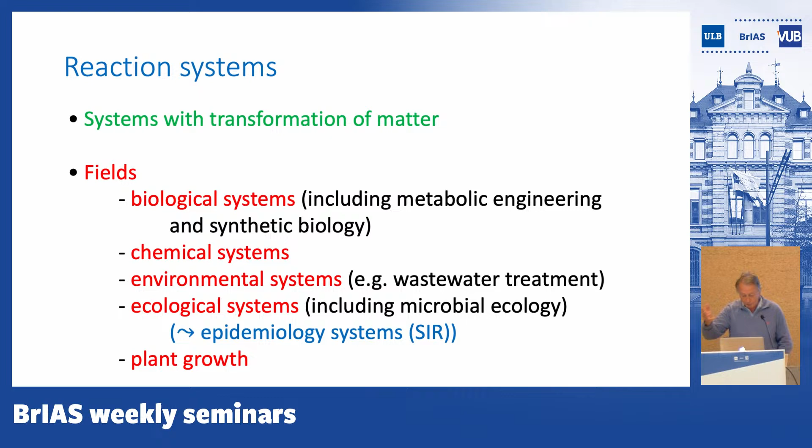And I'd like to mention also plant growth, which was one of my favorite topics. A plant is clearly a biological system, but not as microbes; it's an important biological system, and therefore it is a reaction system.

So what is important to understand is what is different about reaction systems from any other dynamical system we consider in automatic control. First of all, the variables are concentrations, temperature, quantities in ecology, for instance—these are positive variables. In mechanical engineering, you have position or velocity, which can be positive or negative, but that's not the case here. These are all positive. The energy functions are not quadratic functions, and that's because, in some sense, it's fundamentals of thermodynamics related to this kind of reaction system—it's really related to the fact that the properties don't need to come with square values of variables to give energy.

Dynamical models typically come from fundamental balances—mass balances, energy balances, and sometimes momentum balances, which is probably also very typical of what we have in reaction systems. On top of that, most models, 99% of them, are nonlinear, but also come with large uncertainty on the parameters. And there's also a lack of accessibility to many important variables. In many instances, for any of the examples I mentioned before, it's very difficult to get online, precise, reliable measurements of the variables that are important for the dynamics of the system.

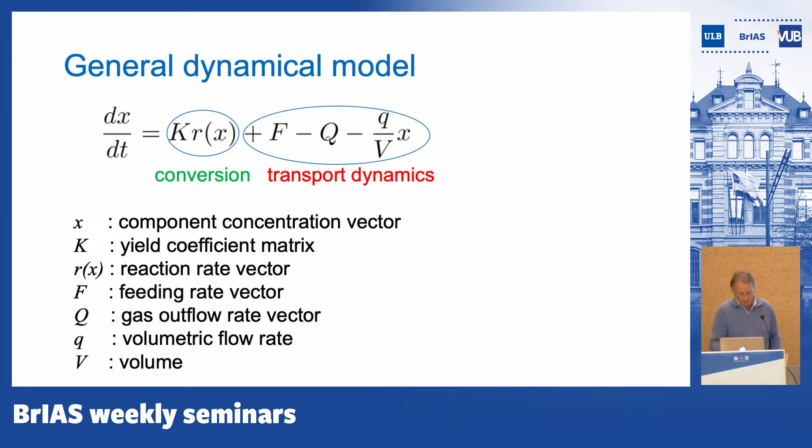Lowercase q is typically a volumetric flow rate, and V is the volume. Having said that, I have everything to go ahead.

Let me take a first example: anaerobic digestion, which is a wastewater treatment known for centuries. It has the advantage of producing methane, so it was very popular at some point, typically with the first oil crisis in the 70s, because people said we found an alternative to produce energy without oil. Anyway, that's a long story.

But this process is very complex. In bio, they say this is an open medium, meaning you have a lot of different species, a lot of different bacteria, if you prefer, that interact. And when I say a lot, it can be thousands. But one way to look at it simply is to consider that typically you have only two populations.

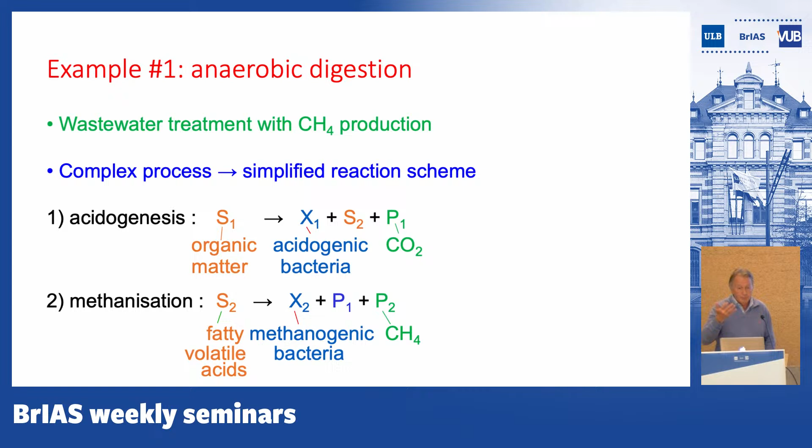So this is what I call a simplified reaction scheme. I have a first step called acidogenesis, when you transform the organic matter you want to degrade by acidogenic bacteria into volatile fatty acids. These volatile fatty acids are then degraded to produce methane and CO2 at the same time, but this is done with methanogenic bacteria.

So if I consider that, my model will be written as follows. I have mass balances for the acidogenesis, the first two elements in my first reaction, and then the second step. What's interesting to look at here is the volatile fatty acids: it is produced by the first reaction, consumed by the second. This is very simple, mass balances, very easy to note.

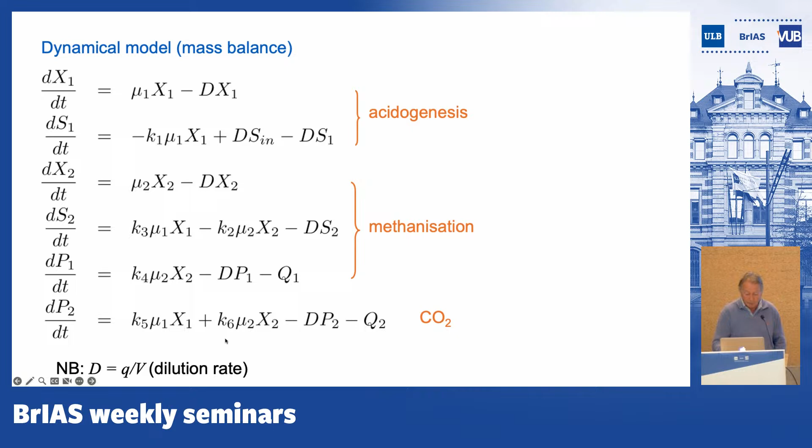In this case I use the classical notation of bio, where D is the dilution rate, which is nothing but the ratio of q over V. So if I want to put that in my general dynamical model, it's very simple: I just have to define my state vector with all the components in the reactions, and my yield coefficient or stoichiometric coefficient matrix.

So each column corresponds to each reaction, and each row corresponds to the intervention of one component in each reaction. For instance, volatile fatty acid is produced by the first reaction, plus K3, and consumed by the second, minus K2. Very simple, and it's completely general.

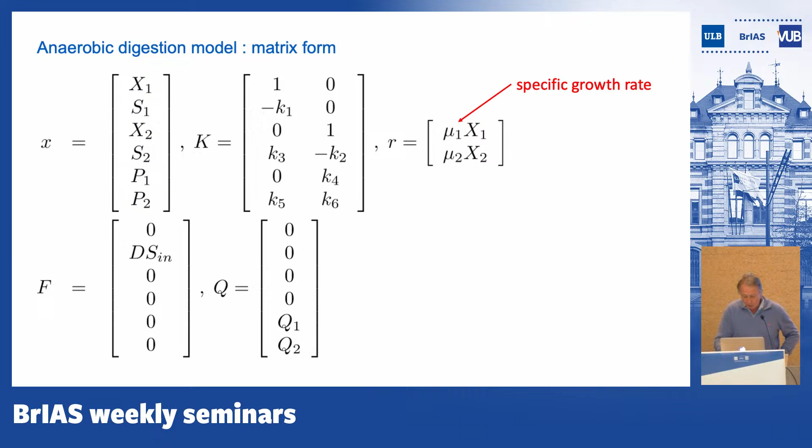What's interesting in that case is that for bio, if we have bacteria, typically the reaction rate is the product of what is called the specific growth rate and the concentration of the bacteria involved in the mechanism. This is known as an autocatalyst: you need the biomass to have the reaction, but the biomass is at the same time produced by the reaction. So that's why it is not just a catalyst, as known by chemical engineers, but an autocatalyst. This is a word you could keep in mind if you wish.

And then you can have a lot of other dependencies. For instance, you know that one type of microorganism will be active in a specific range of temperature. Okay, fine, so let me look at the bio, let me look at the chemical example.

In that case, typically what is a matter of issue for control is the fact that you have a reaction that can explode, if you wish. This is typically known as a non-isothermal exothermic reaction, so when the reaction enthalpy might be negative, this can be a source of problem when you want to control it.

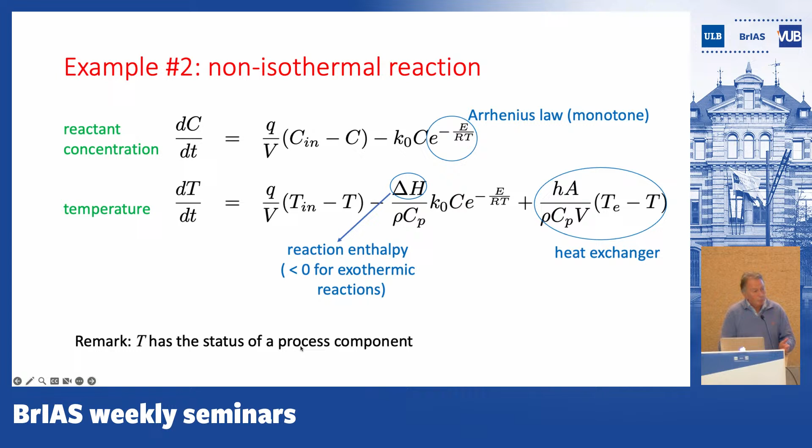Let me move to a third example, an ecology example, the famous prey-predator model, where you have a mass balance for the prey, with a growth rate and a consumption term by the predator, and for the predator, that's the production by consuming the prey, and then you have a mortality rate.

This is exactly what I would have in that case in the general dynamical model. Once again, it fits in the general dynamical model.

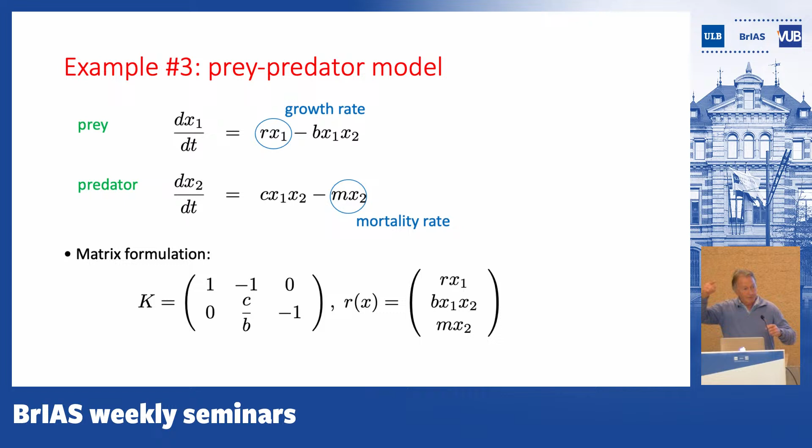And this is a great example. I could tell you for long about that model because there are so many nice properties, including the fact that it's periodic. With that model, the idea was to emphasize that typically when you have a lot of prey, it tends to lead to an increase of the predator. They have a lot to eat, but then the number of prey decreases, and then the predators don't have enough to eat anymore, so they decrease, and at the same time it's a kind of periodic behavior which is observed a lot in nature.

Okay, so now I have my basis, I have my model, and I can start working. But I want to do more, because I want to see what I can do - can I take advantage of the fact that this reaction system has some specificities? So that's what I would like to mention: reaction invariance and slow-fast dynamics.

The notion of reaction invariant is very well known by chemical engineers in general, and chemists also. It's the fact that when you have a reaction A giving B, this means that the number of moles of B that I produce are exactly connected to the number of A that I consumed. That's a constraint, so in a mathematical sense this means there is a mathematical constraint somewhere.

So typically when you have a system which is closed with no exchange with the environment, in that case this is a true mathematical invariant. This is exactly what I show here.

So there's a general property: I can make a state partition XA, XB, such that some matrix KA related to XA is full rank. And the property is that I can define a variable Z, which is a linear combination of XA and XB, where A0 is the solution of this matrix equation. Then I can rewrite the dynamics for XA and Z, and it is completely equivalent. These terms are only related - independent of the kinetics or the transformation, let's say.

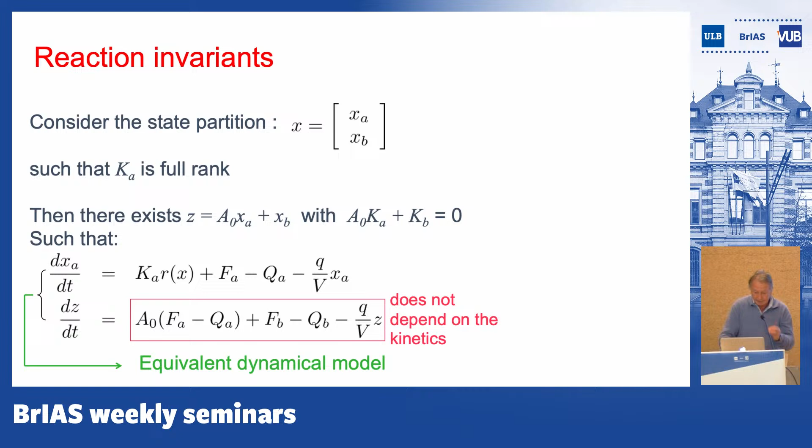And in that case, these terms, which are typically transport dynamic only, if the system is closed, this must be equal to 0. That's what I said just before. This is exactly the fact that in that case, it is a mathematical invariant. And this is a very strong property. So the idea is, can we use that for control?

Second property is what I like to call slow-fast dynamics, often mentioned as singular perturbation, but I like the way this slow-fast dynamics ends up coming up with a very well-known approximation in chemical engineering, which is called the quasi-steady state approximation. Let me try to explain.

Assume that I have a sequence of reactions, A1 gives A2 gives A3. And I assume that the first one is slow and the last one is fast. These are the reaction rates related to each reaction. K01, K02 are kinetic constants, but they have to be such that the reaction rate must be equal to 0 if there is no reactant. If I have no A1, I cannot have the reaction A1 gives A2.

Intuitively, even if you're not a chemical engineer, you will understand that very easily. If this reaction is slow and this one is fast, this means that any time I produce 1 mole of A2, it is directly transformed into A3. So it's like having one reaction, A1 gives A3.

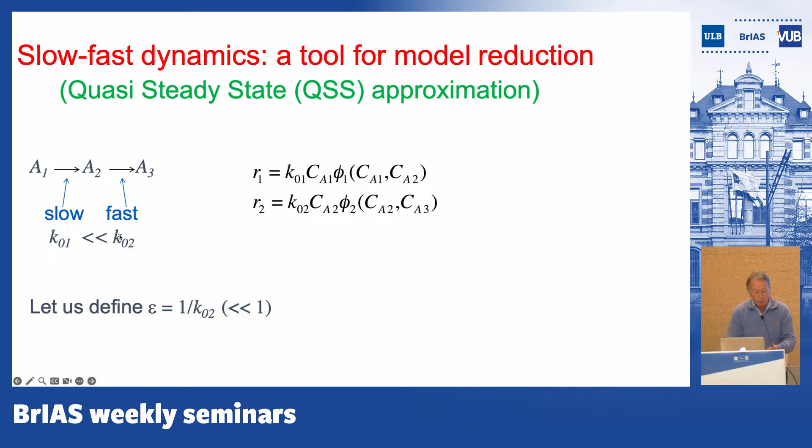So how can I come up with that conclusion? I define a small parameter, which is the inverse of the kinetic constant K02. And I rewrite my dynamical mass balance for A2, the concentration of A2, pre-multiplied by epsilon. I put epsilon to 0, and then I obtain this algebraic equation. Since typically I assume that this term phi has to be different from 0, the only option is that the concentration of A2 is equal to 0.

Second step, I make the mass balance for the sum of A2 and A3. I come up with this equation, but this becomes the mass balance equation for CA3 because CA2 is equal to 0. This is done because typically I say that A3 is produced by the first reaction. Simply as that.

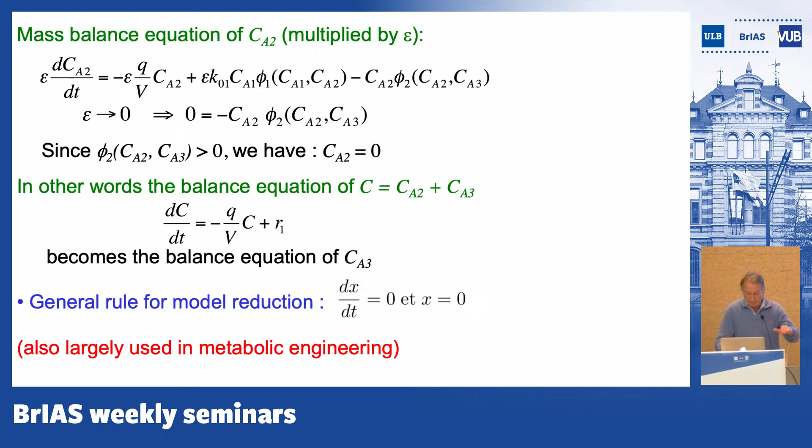So I can come up with a general rule with respect to that. But what is interesting is that, for instance, if you look at metabolic engineering, this property is very largely used too. It's a very common assumption that's used. The quasi-steady state approximation that I justify here is very common in metabolic engineering. So I try to make the connection with every field that I mentioned before.

Okay, let's move to state observer. And then I would like to say I can use my reaction invariant. My reaction invariant says that I can write the dynamics of the system, part of the dynamics, independently of the kinetics, which is an issue because I mentioned that I have a number of models, typically for the reaction rate, but all these models are typically heuristic. There's no fundamental model used in practice for kinetic modeling.

So in that case, this is an issue. I would like to have a state observer which is in some way insensitive to the knowledge of the kinetic modeling. So now I make another partition when I put x into x1, what I measure, and x2, what I do not measure. I rewrite my z that I mentioned before as a linear combination of x1 and x2.

And I have to make sure that I can invert A2 in that case. In some cases it's just a left inverse, but it's a classical inverse in most cases. So then what I do, I compute z from the equation that I mentioned just before, and then I invert this relation just to get an estimate of the variable that I do not measure.

And this is an observer, even if I don't have, as a classical observer, a correction term, this is an observer. Because I can guarantee, that's why we call it an asymptotic observer, the convergence. And the guarantee of convergence is related to this condition, which is very classical in adaptive control, called the persistence of excitation condition. So I can guarantee that as long as the dilution term, the flow rate, is not equal to 0 for too long, then the estimation of x2 hat will converge to x2, the true value.

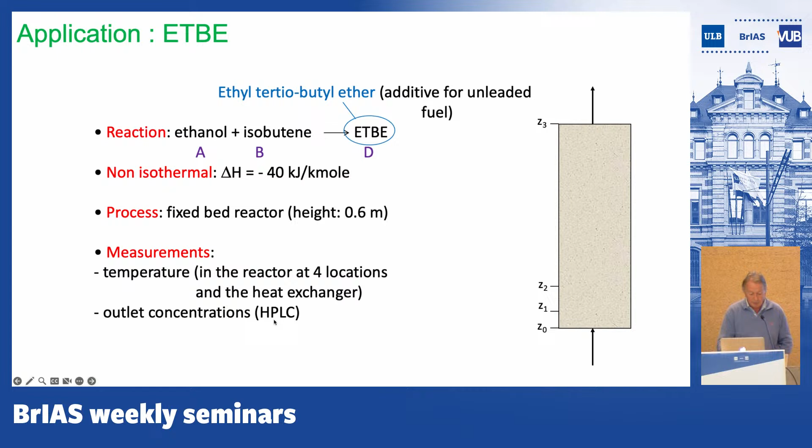The process, so I mentioned it. What we measure is the temperature at 4 locations: inlet, outlet, and 2 positions in the reactor. And also we measure the concentration via an HPLC at the output of the reactor.

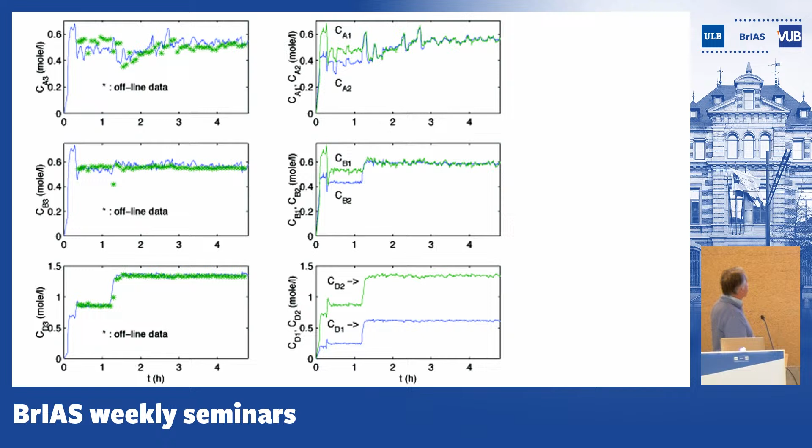So these are typically the measurements that we have in that case: the temperatures, and the concentration. This is typically what we obtain in terms of estimation. As you can see, I have a quite good fit of the different variables in that case.

Okay, online parameter estimation. As I mentioned, there might be a lot of uncertainty typically on the parameters in the model, so we probably need tools to be able to reconstruct the parameter online.

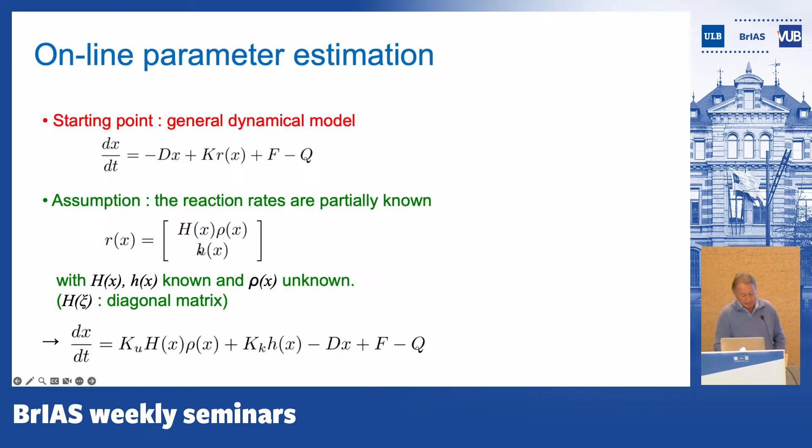So I go back to my general dynamical model. I assume that the reaction rates are partially known. This is the unknown part, this is the known part. And I rewrite my dynamical model as follows.

So if I do that, and I assume that I have a number of measured or observed components equal to the dimension of the matrix H, which is here, I just use a classical observer-based estimator with this correction term related to the states.

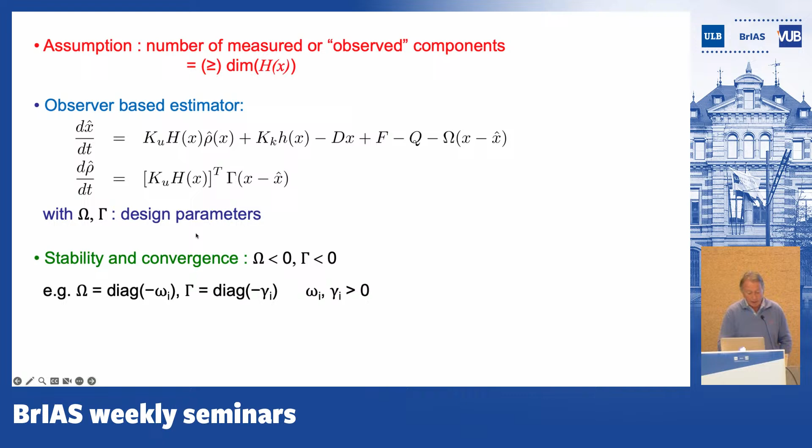And so classical parameter design, omega, gamma. I know that typically I have this kind of rules. I can do that, it works, but we found one way which is much better than that, and very easy.

So we say we can use a transformation, an auto transformation in that case, when I have zeta, which is the inverse of the submatrix K_u, multiplied by the state vector. And then if I use that, this is how I can rewrite the equation.

But it happens that in that case, because of this transformation, I can rewrite my observer on the basis of 2 by 2 equations. So one estimation is related to one measurement, or more precisely, one combination of measurements.

And then in that case, it's very easy to calibrate, because I have only a system of order 2, which is very easy to calibrate. This is exactly what we have in that case.

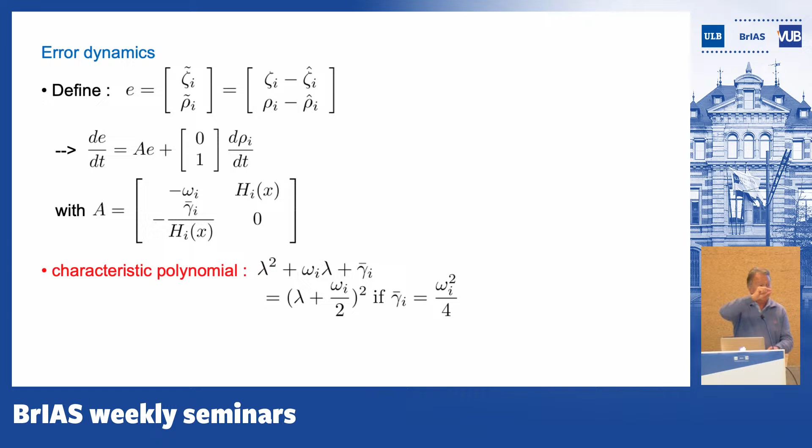So we found a way to get a very simple way to calibrate the system, and a calibration that can be different for each parameter that you want to follow. Because in that case, typically what you have to follow is not a constant parameter, but a parameter that might change with time. Okay, so that's why I would like to illustrate that in the next slide.

So the application now is animal cell culture, which is also very well used in pharmaceutical applications. In that case, we have reactions, let's say with 2 reactions. Glucose is in both cases.

In one case, you only grow biomass, let's say it's called respiration, because you have oxygen. And then in the second case, you produce lactate. And that's interesting, so this is different from what I did before.

We have a fed batch reactor. What is a fed batch reactor? In a fed batch reactor, let's say you fill partially the tank, and then you introduce matter progressively until the tank is full. Okay, so that's why it's called fed.

So the first phase is fed: I'm feeding it, and then when it's full, I wait for the reaction to be completed. So this is what is called batch. So that's called fed batch, and that's very interesting, because you don't have a steady state in that case. There's no steady state. The steady state is at the end, when there's nothing to be consumed anymore.

So this is a kind of system that is always in a dynamical situation, very different from what we have in many other automatic control applications. We measure glucose and lactate plus some offline measurement of biomass, and we'd like to estimate the two specific growth rates. That's very interesting.

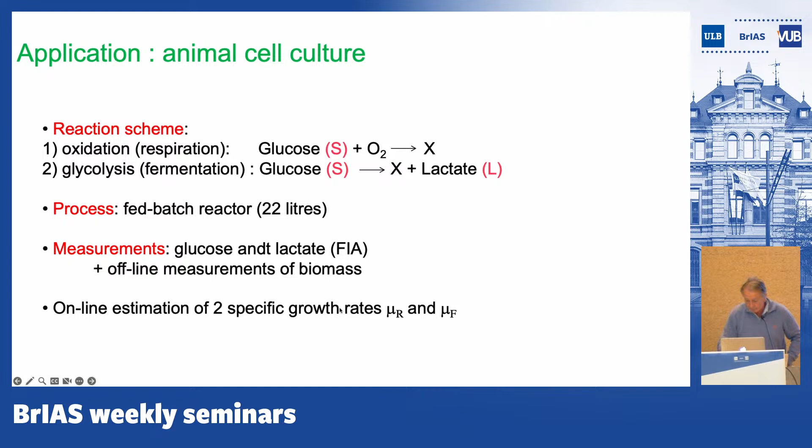The measurements are at the top. These are the two mu's that I would like to estimate. If you look at the two mu, the two specific growth rates, they have a completely different behavior. So we need some tools to calibrate differently, so we can handle them independently.

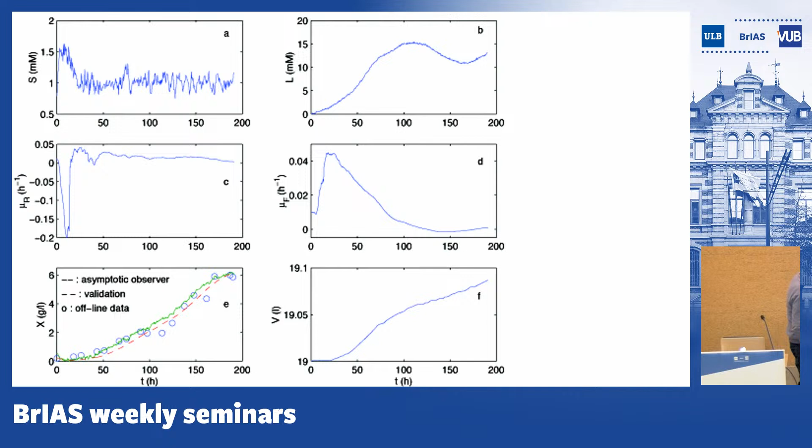This is great, and the challenge was to make sure that we could fit. The circles here are the offline data. I used at some point an asymptotic observer. This is the green line, and the red line is the validation. What is the validation? This is a crazy exercise.

In that case, it's a completely unstable system. So you try to compute the mass balance equation for the biomass, just putting in the value of the estimation of u on the two mu's. If you look at these equations, they are unstable, so if you make a slight difference in the calibration parameters, the estimation explodes. This is really a very interesting exercise, and very important in that case.

If you're interested in that type of result, this is the result that I obtained a few years ago with Romeo Ortega and co-workers, extending the result that I mentioned just before.

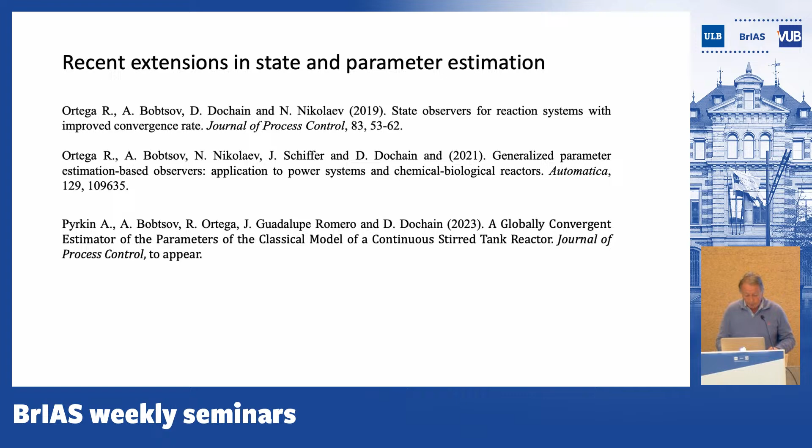Let's move to adaptive control. Typically, adaptive linearizing control in that case, since the model is typically nonlinear, we have to find some way to handle the nonlinearity, and at the same time, since there's a lot of uncertainty, it might be good to make sure that we can adapt the controller to the changing behavior of the system. So typically, if I want to write it in a general way, I can write the dynamics of the output that I want to control that way.

This is typically done by using a slow-fast dynamic reduction. Typically, I need to have all these terms: I need a reaction term somewhere. If I have gas, that's important because it's easy to measure, so it's probably important to have it in my equation. And then I also need the fact that I feed the system by some external reactant or feed.

So, in a very simple way, I want to have a first order differential equation, first order dynamics in that case. I combine the two, and I typically have my control equation. If I decide that the flow rate is my input, which is really standard in any reaction system, and since I have uncertainties on the parameters, I typically have to estimate alpha, beta, and gamma, and the reaction rate, which might be a source of uncertainty too.

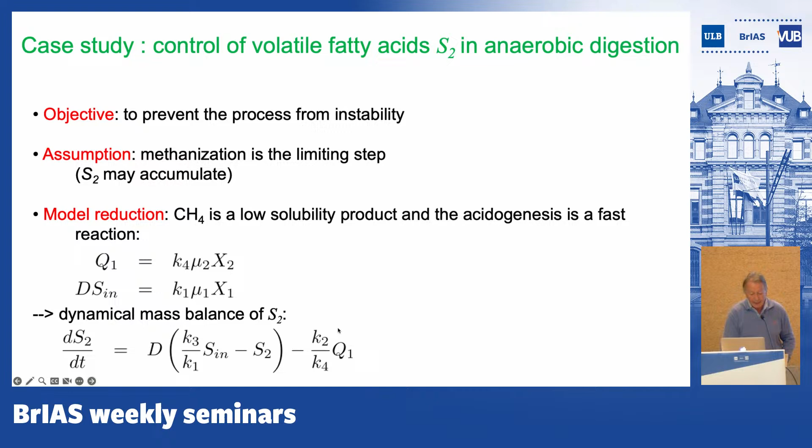We can do one step further. Is it possible to get to optimal operating points without knowing what is the operating point? Once again, a lot of uncertainty about the system. But we know that on paper, and we know from practice, that there is an optimum somewhere. That's really the job of adaptive extremum seeking. So you do control at the same time that you do optimization. In chemical engineering, people tend to call that real-time optimization, but that's simply adaptive extremum seeking. This is adaptive control, but at the same time, the adaptation is related to the fact that you are looking for the optimum in closed loop.

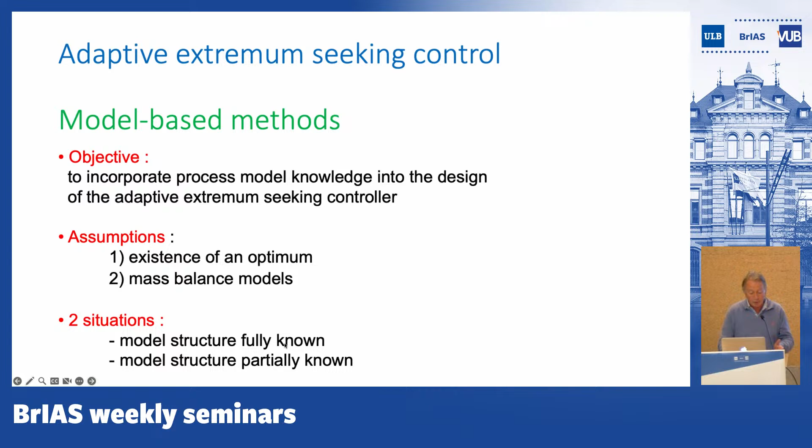There are a number of results on that, but there are typically two types of situations: one where the model structure is fully known, and one which is partially known. I'll just use an example for the second part. So once again, I go back to a simple example: one biomass, one substrate, and one product.

This is the equation that we have obtained by model reduction, and we assume that we have a Monod equation in that case. So we don't know the parameters of the Monod model, and for the convergence analysis, we need to assume that this term is bounded. We assume that we measure the gas flow rate and we measure the substrate concentration S.

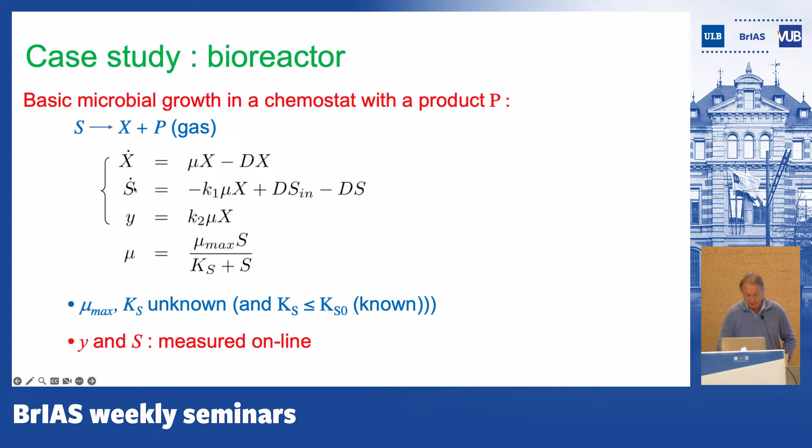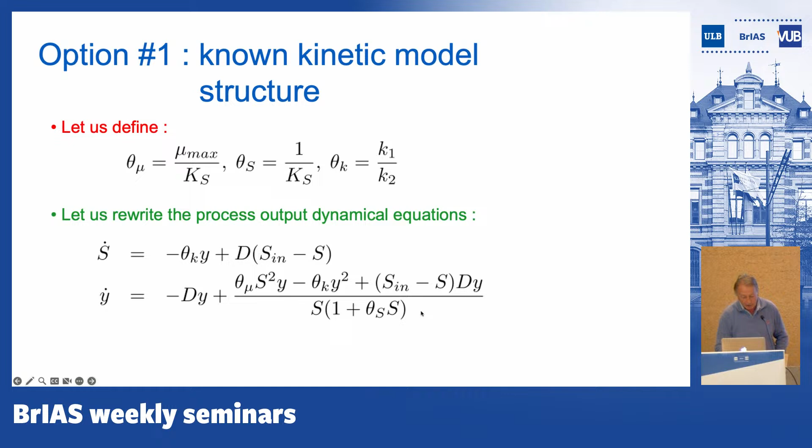So what we do is define three new parameters, theta mu, theta S, theta K, and we write the dynamics of the system as follows. We compute the time derivative for y, which is exactly what we have here. Note that we have this at the denominator, which will be interesting to understand.

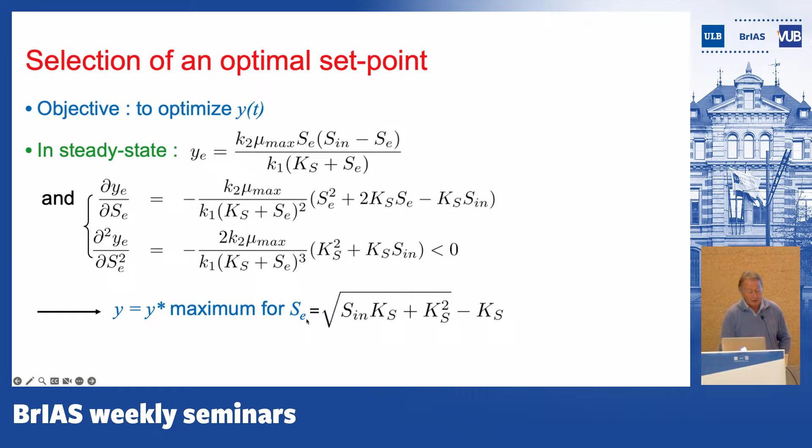So if I want to make sure that I have an optimal point, I compute twice the derivative of y with respect to S. You see this term is strictly negative, and you see that there's an optimum if this term is equal to 0. So the optimum is for the concentration of substrate which is equal to this value.

So this is two steps. First step is the parameter estimation, once again this kind of classical observer-based estimator. The parameters are in the two equations here, and I update the parameters by using this, except that I also use a projection algorithm in that case to avoid division by 0. Since I have this term here, it might happen that this term becomes negative, and so this might be equal to 0. So we use a projection algorithm to avoid division by 0, typically.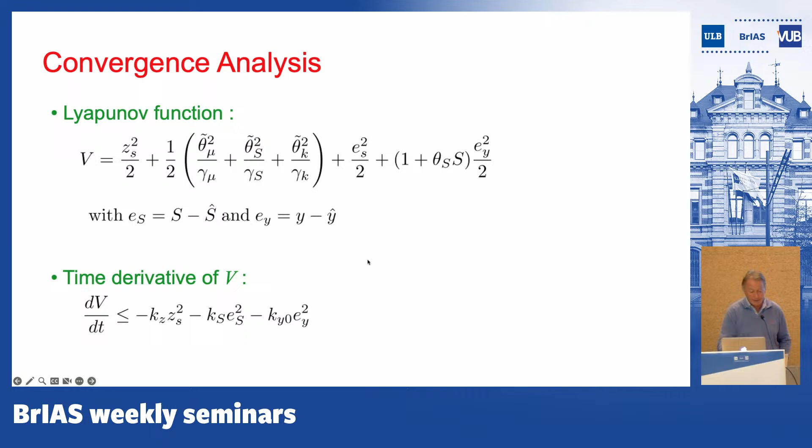So this is probably one of the nice tricks in this case. This is classical: I have a term which is the square of the control error, terms related to the square of the error in the parameter estimation, and then two terms related to the estimation of the observer-based part of the parameter estimation. And it's easy to show that in that case, I have this value for the time derivative of V.

Typically, I can invoke the LaSalle-Yoshizawa theorem and the LaSalle invariance principle to show that I will converge close enough to the optimum, which is exactly the result I have here. So typically, these terms are related to the external excitation, or the dither signal if you prefer. If my dither signal and its time derivative tend to zero, this term will tend to zero as well.

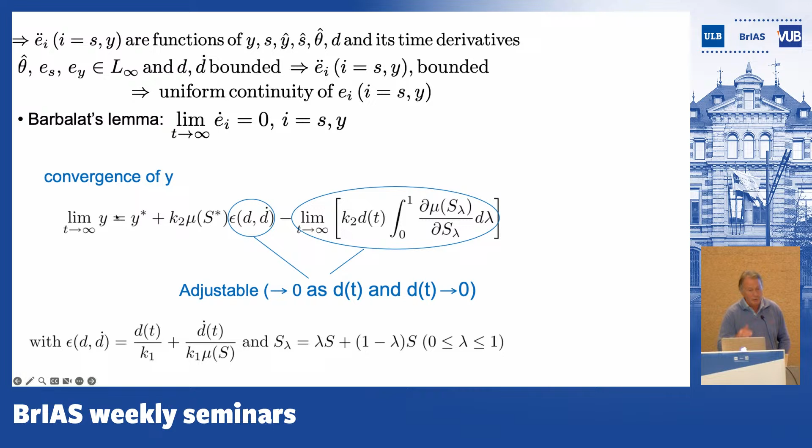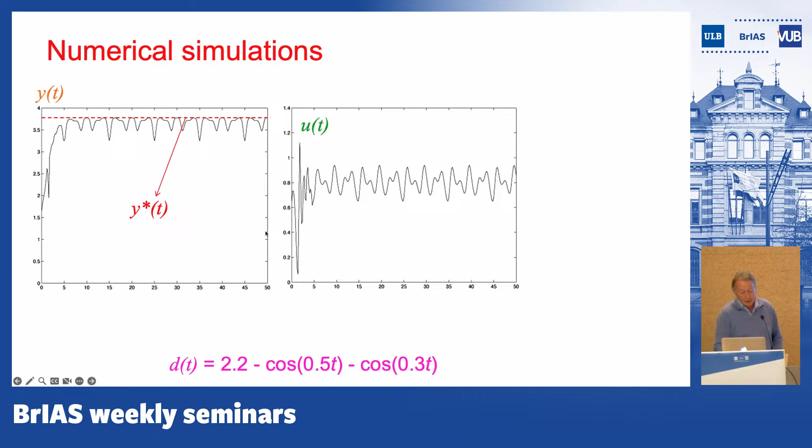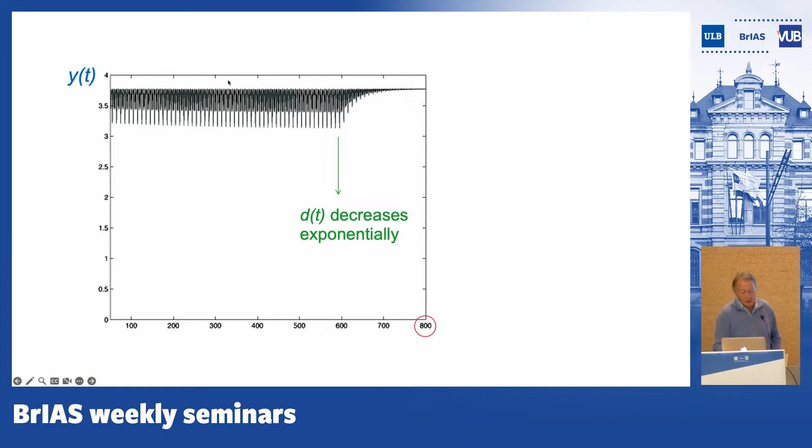So in that case, I can show that I converge to the optimum without knowing the optimum. That's the idea of adaptive extremum seeking. Just a few simulations: note that because it's a maximum, it's impossible to move above it, we are always below it. This is exactly what we have - the convergence of the parameter in that case, and the fact that if we remove the dither signal, it will tend exactly to the optimum. So it can remain close enough to the optimum, and then if I remove the dither signal, it will tend to the optimum, the parameter, in this case.

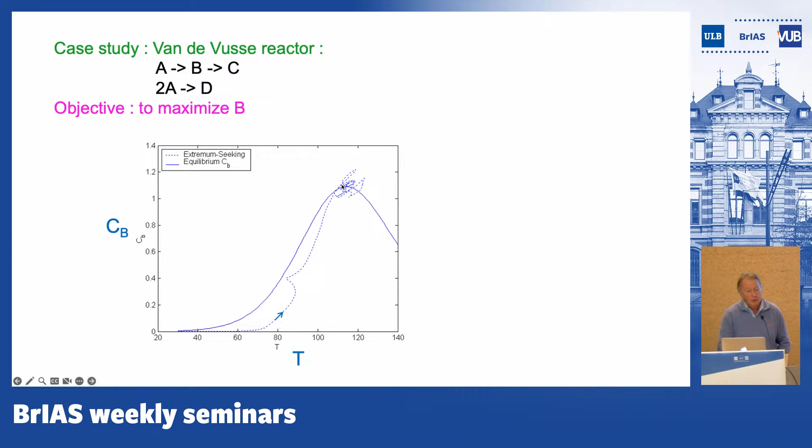Okay, so I'm at the end of my presentation, so I would like to thank you very much for your attention, and I'll be happy to answer any question.

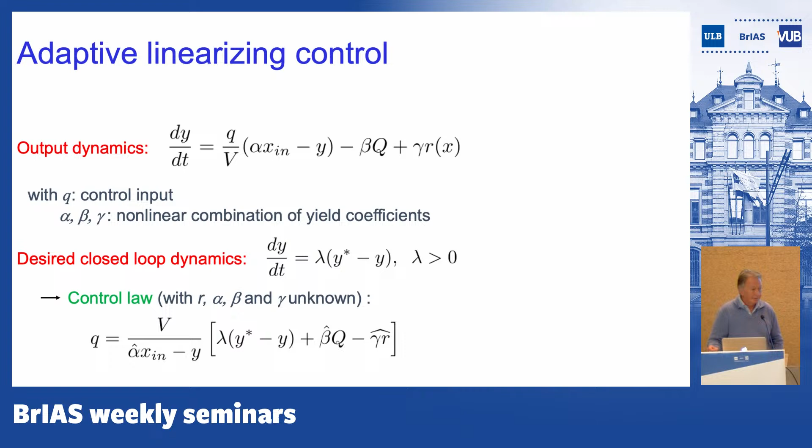Thanks, I'm from a completely different field, so it's interesting to see your presentation, but I'm not sure I follow everything. One thing that struck me is that throughout you seem to assume well-mixedness of the systems you're looking at, so that the concentrations can be described by a single scalar variable. In my field, sometimes we've moved away from these kind of equations to go more towards simulations that are more individual based, because that well-mixedness assumption is violated. I'm curious whether you've sometimes felt the need to move away from that.

So that's a personal decision, to make a presentation considering only homogeneous systems. But I worked a lot on what is called distributed parameter systems, PDEs, which are very largely used in reaction systems, chemical engineering for instance. I have a book coming out these days on that topic. Of course, in that case I know how to handle it, but it's more complex than what I've shown here. There are many ways to extend what I said to cases where I clearly don't have homogeneous conditions.

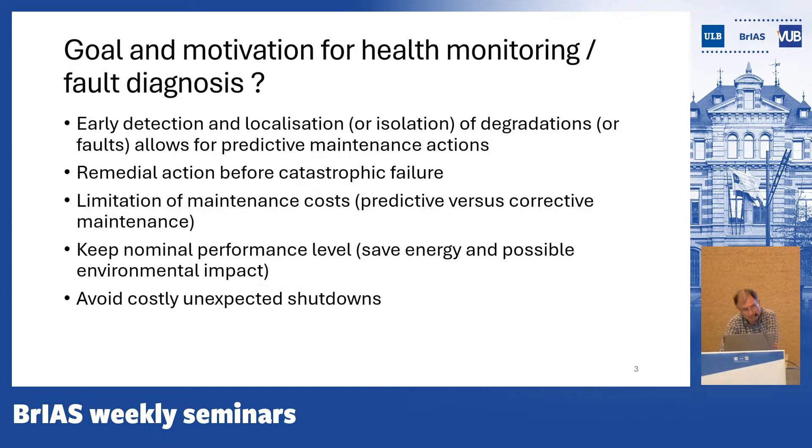It also allows limiting maintenance costs because predictive maintenance will typically be much less costly than corrective or preventive maintenance. It also allows us to keep nominal performance levels for our process or device, and so probably save energy or avoid possible negative environmental impact. And also we are able to avoid costly unexpected shutdowns.

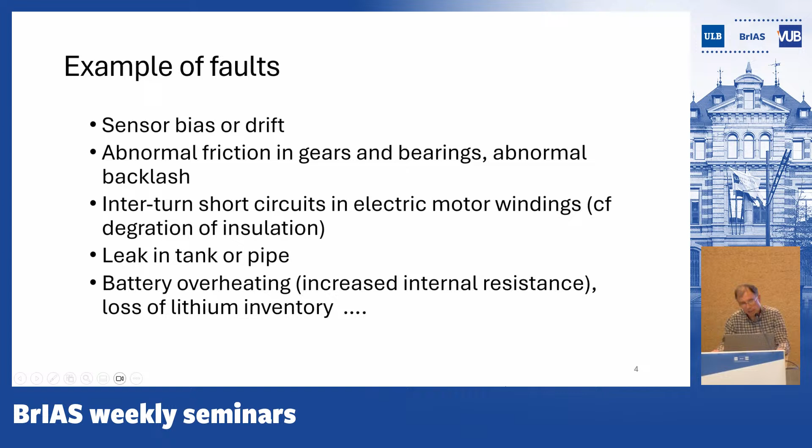So what are some examples of faults? Here are a few possibilities: sensor bias or drift, abnormal friction in gears and bearings, abnormal backlash, inter-turn short circuits in electric motor windings due to degradation of the insulation, a leak in a tank or a pipe, battery overheating due to increased internal resistance, and so on.

So a typical fault diagnosis system is structured in the way presented here. On top you have the supervised system, which can be an electric motor, a wind turbine, and so on. Typically this model is driven by some known inputs, which are the commands you are sending to the actuators. And you also have a series of sensors that equip the device, and these provide what I call here measured outputs.

This system is also subject to disturbances. If you think of a car, you will have wind gusts that can affect the speed of the car, or a difference in the slope of the road. These are disturbances, so unknown, unmeasured signals that affect the behavior of your system. And the faults are also unknown.

So what we want to achieve is being able to detect and determine when the behavior of our system is no longer normal, from what is available, namely the known inputs and the measured outputs.

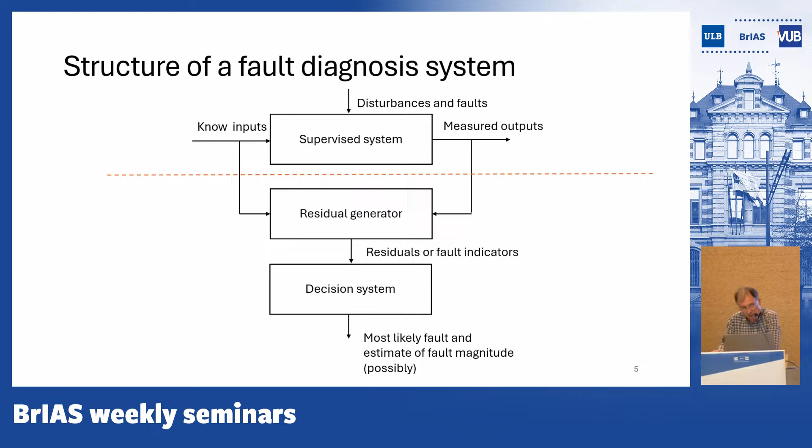So I will illustrate through two case studies some issues in the design of a diagnosis system. In particular, I will show you that with quite simple models, we can already achieve quite effective results.

So what is the motivation? We are looking at two types of applications. One is the case of reusable launchers, or simply launchers. The orientation of the nozzle in those launchers, and for future reusable launchers the deployment of the legs of the launcher—these things are actuated by electromechanical actuators, which we denote in short EMAs.

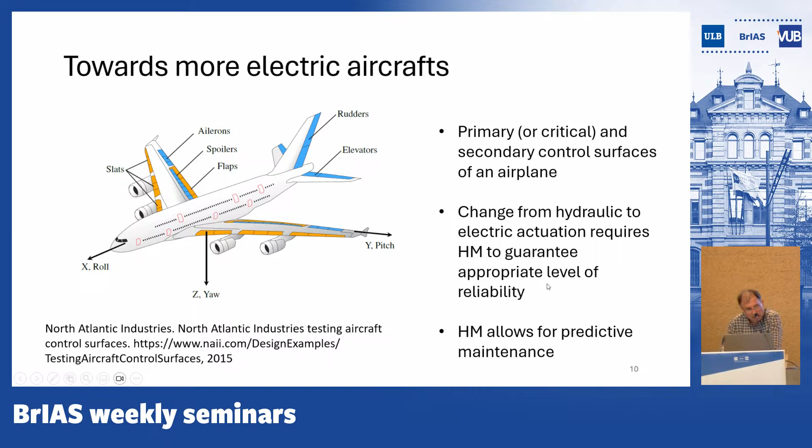But to equip such critical control surfaces, these EMAs must be equipped with health monitoring systems to guarantee the appropriate level of reliability. And so that's a second motivation for the use of such actuators.

So looking a bit more carefully at these electromechanical actuators, here is the way they are composed. They have mostly an electric motor, which is a permanent magnet synchronous motor in the case we will consider. This motor is driving a gearbox and a ball screw mechanism that induces the movement of the rod here. There is a suitable power electronics that ensures the control of the motor.

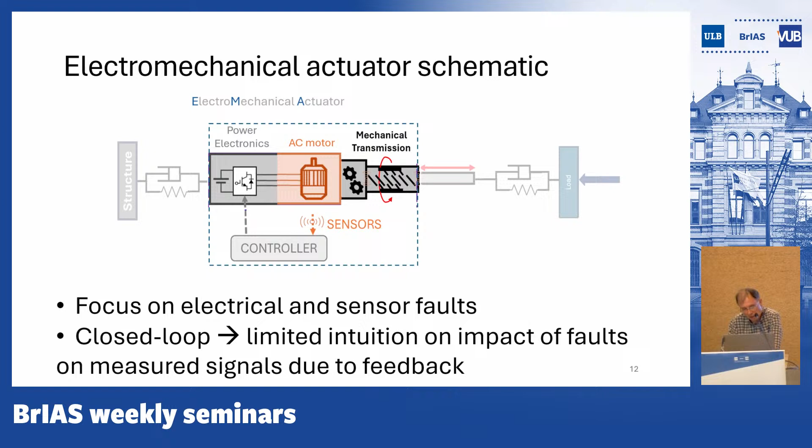So here we will focus on electrical and sensor faults, and one of the difficulties is that we are working in closed loop, so that the impact of the faults is more difficult to understand, at least from the intuitive point of view.

I will not bother you too much with electric motors, but just to tell you that we consider a star-connected motor with isolated neutral point, and we consider a situation where a sinusoidal flux is induced by the permanent magnets of the rotor.

One of the faults that we will consider is inter-turn short circuits within a coil. This is due to the fact that the winding is made of turns, and the coil is surrounded by an insulator, but this insulator can be destroyed as time evolves, causing short circuits between some turns of the coil.

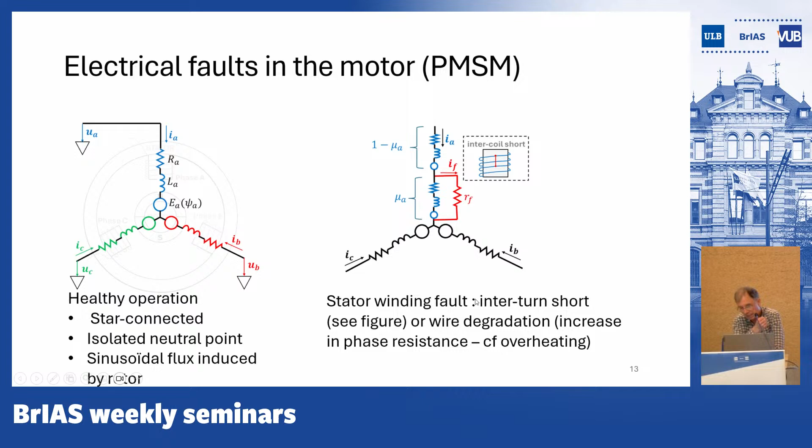Another possible fault is the increase of the resistance of a coil, due to the fact that when there is overheating, the section of the coil could decrease.

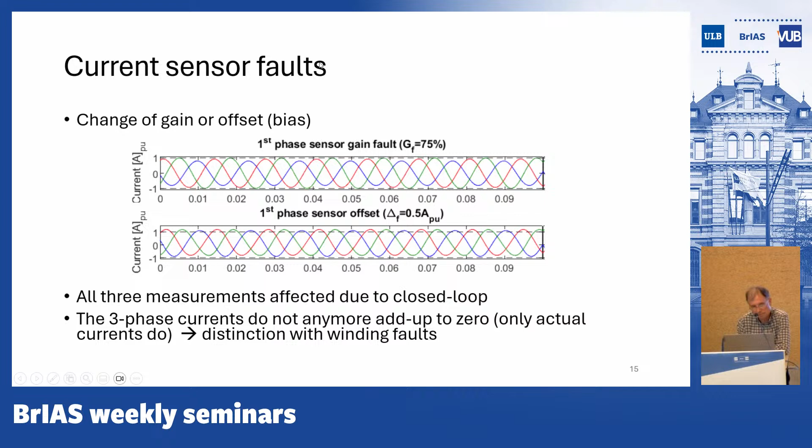So we see that we can actually model these current signals independently without the need to model the motor itself. That's what we are going to do to try to achieve fault diagnosis. The advantage of doing so is that we will not need to know the parameters, the resistance, the inductance of the motor, which can be subject to temperature changes, and this brings uncertainty. Here we stick to the measurement of the current.

So this is for the healthy situation. For the faulty situation, what happens is that the signal magnitudes are different and you introduce a phase shift. So if we take as reference the first signal here, we can actually introduce four variables: MB over MA, MC over MA, and the respective phase shift with respect to phase A here. So that makes four unknowns.

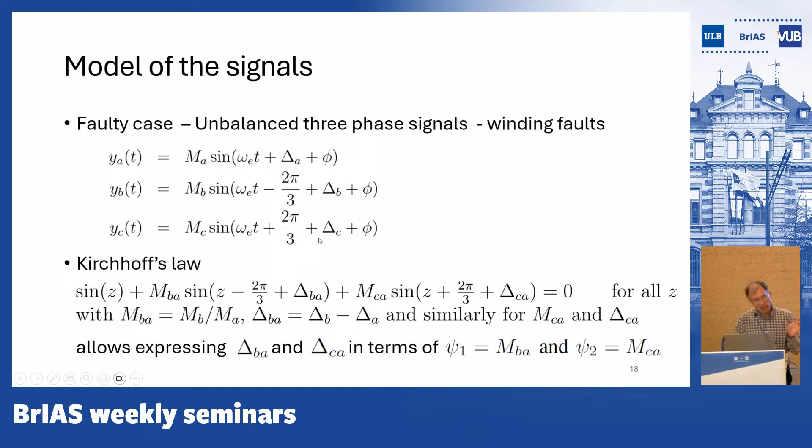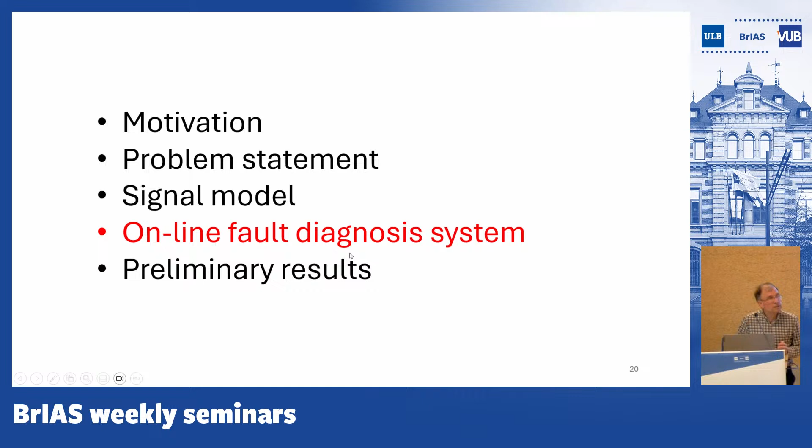So this brings us to the design of the online fault diagnosis system. The equations that I've just written down, I can formalize them a bit more and discretize them. As we have seen, in the faulty case, there are some parameters that are introduced here. These parameters do not change very fast, and so we can consider that somehow when we have recorded data, the parameters are quasi-constant with respect to the dynamics of the sine wave that we are considering.

And so that's what we are saying here: our parameters are quasi-constant, but they are uncertain, and this is represented by adding noises here. This is the standard form for this output equation here. And what we have also introduced is that the current signals are subject to noise, and we have represented measurement noise here by V. So these noises can be characterized by the so-called covariance matrix indicated here.

And so now the problem is to determine in what situation our motor is working. So to this end, we want to estimate the parameters here and determine what is the most likely model among the models we have been considering previously. So we have this model, this model, this model, plus the healthy model, which is the one that fits the data best.

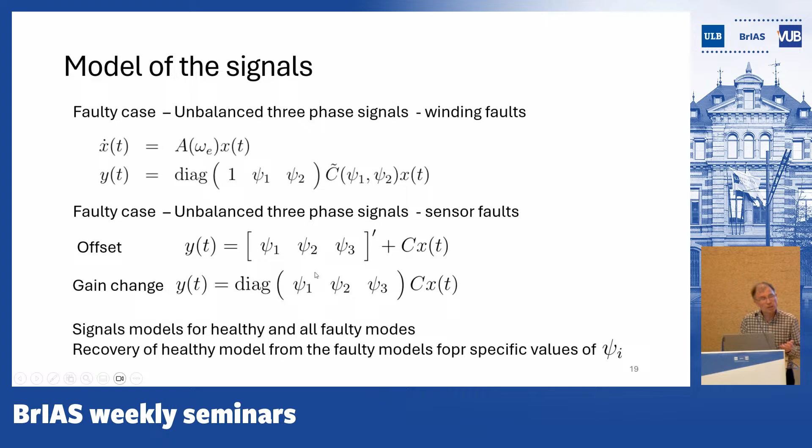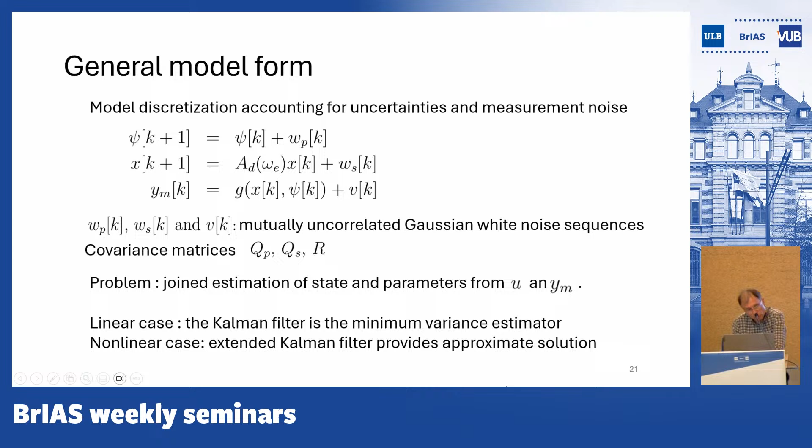And so to achieve this goal, we will resort to what is classical in control engineering, namely state observers. And here, as we are in a stochastic framework, we will resort to what is called a Kalman filter. A Kalman filter, if I had a linear model, would yield the minimum variance estimator. Here, as I'm in a nonlinear case, I look for an approximate solution, which is given by the extended Kalman filter.

This extended Kalman filter takes as input something I forgot to mention: I assume my motor is operating at constant speed. Omega E here is the electrical speed of the motor, linked to the mechanical speed through the number of pole pairs, but that's a bit technical. I assume this electrical speed is constant, otherwise I would not have currents keeping the same frequency. For the application I consider, there are at least some times where such an operating mode is encountered.

So I have the speed of my motor, I have my measurement of the current, and what I generate is an estimate of the unknown parameters in my model. But I also have an indicator of the quality of my estimate through what is called the innovation signal.

The innovation signal is simply the difference between the measurements and the prediction of my measurements from the previous data. So this is the prediction of my current at time k, given all available measurements up to time k minus 1. It's called innovation because it's the new information brought by the measurement at k. It turns out these quantities have specific statistical properties estimated by the Kalman filter through the covariance matrix of the innovation signal and the covariance matrix of the parameter estimate.

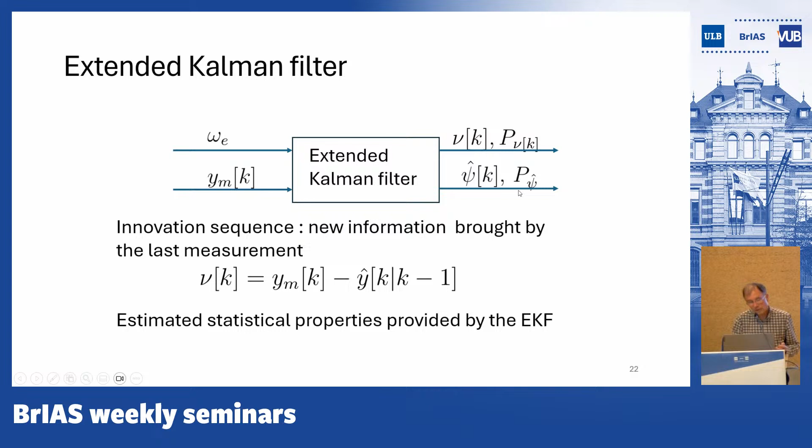So what we do is run different state estimators, one for each specific situation. We have one Kalman filter for the healthy model and three extended Kalman filters, or here dual extended Kalman filters—I won't go into the subtleties—one for each type of fault.

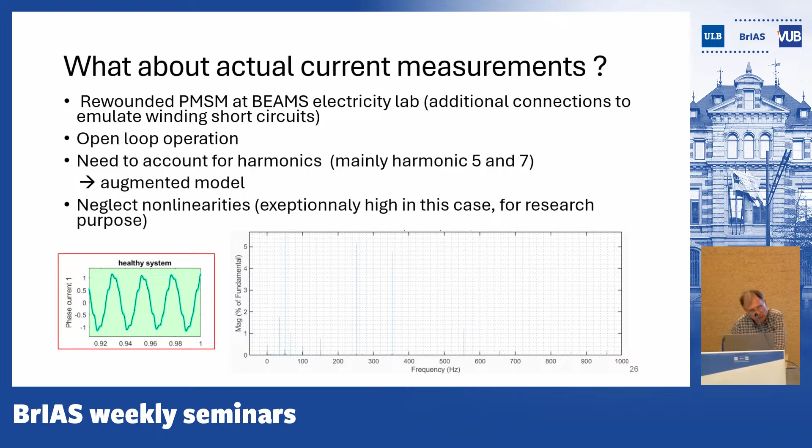So here are the first results obtained by Louise on these experimental data. These data are for the moment obtained in open loop, not in closed loop, so we still have some work to do. This is what we call the confusion matrix.

What you have here is the true class, so we distinguish healthy, motor fault, sensor gain fault. We have not considered sensor offset here. And here you have the decision taken by the diagnosis system.

Here we consider all the data that Geoffrey has provided us with. What he did is he modified the load of the motor so that we have different signal-to-noise ratios in our data.

You see that if we consider all signal-to-noise ratios, we get some indeed erroneous decisions. Like for instance here, you have 13 situations where, despite the fact that you have a motor fault, it's declared to be healthy. So this is missed detection. You have also here 1 false alarm, but you see that in the majority of the cases, a correct decision is taken.

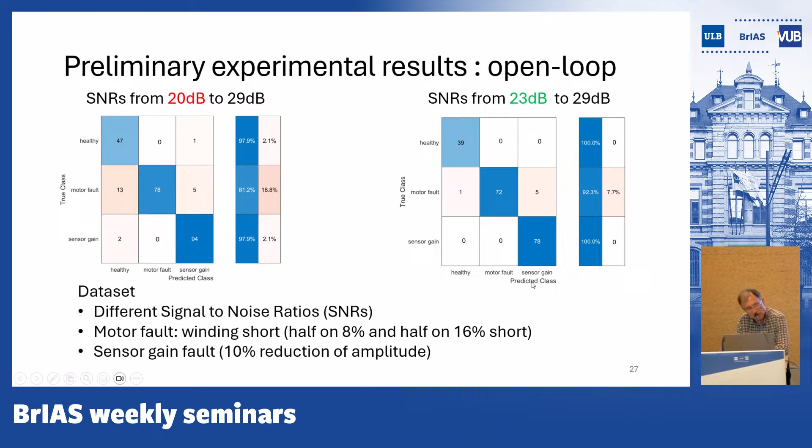So what is the main message to take from this first example? By analyzing and understanding the effect of the faults on the measurements, we were able to use simple signal models and avoid using a model of the motor for which we need to estimate parameters.

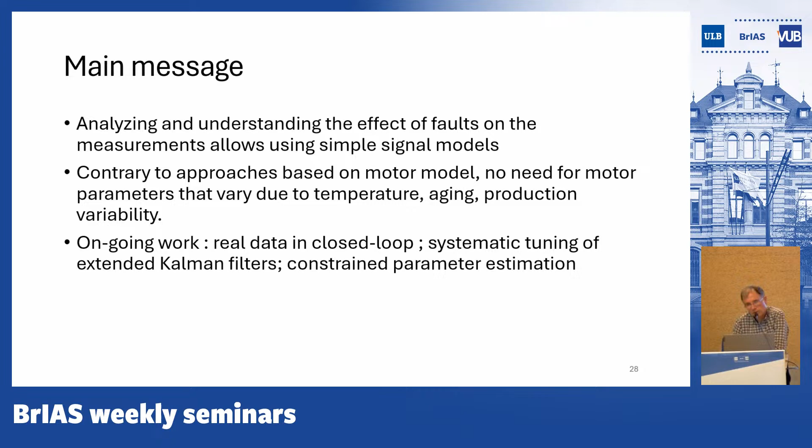Parameters that could be varying with temperature, for instance. So ongoing work is to look at real data in closed loop, systematic tuning of the extended Kalman filter, and possibly also constrained parameter estimation, because indeed here we have to go in these two steps where we check that the parameter estimate does not embed the healthy case.

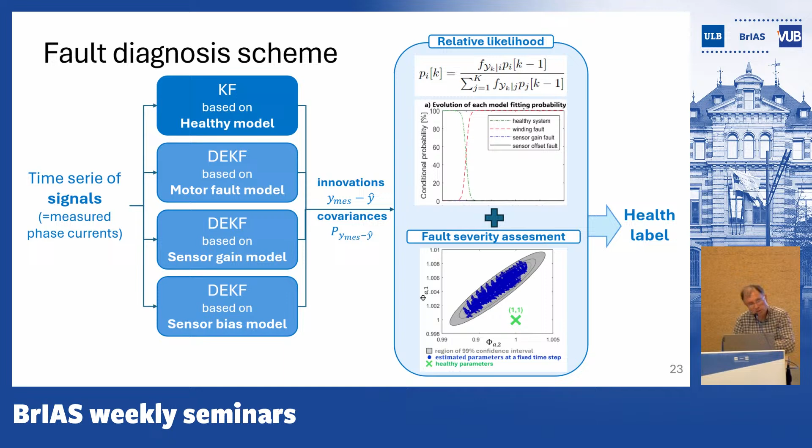Another approach could be to make sure that this estimator will never estimate the healthy case by enforcing that the parameters stick to some situation where the model is faulty.

So that was for my first case study. Please stop me if I'm too long.

The second part of my talk will be dedicated to wind turbine monitoring. I will have 3 sections, but the last 2 are very short. I will start with the issue of loss of performance detection, then go to generator cooling system monitoring, and give a few hints on a global monitoring system.

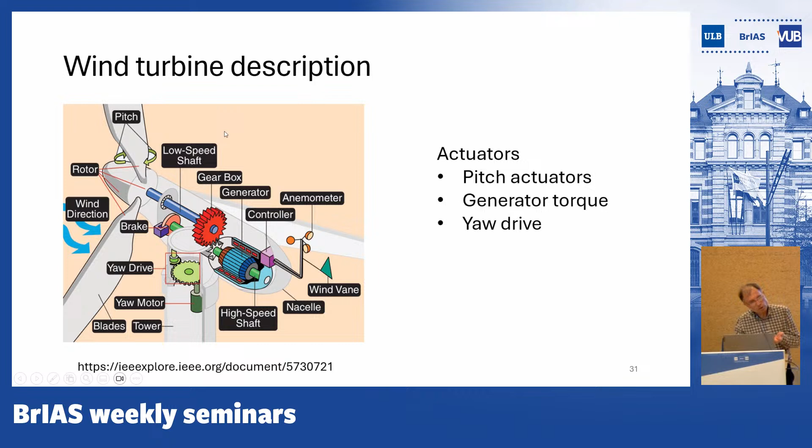And finally, you have the generator torque. You can somehow try, thanks to the power electronics, to control the torque of the generator in such a way that you control the rotational speed of the generator and the wind turbine.

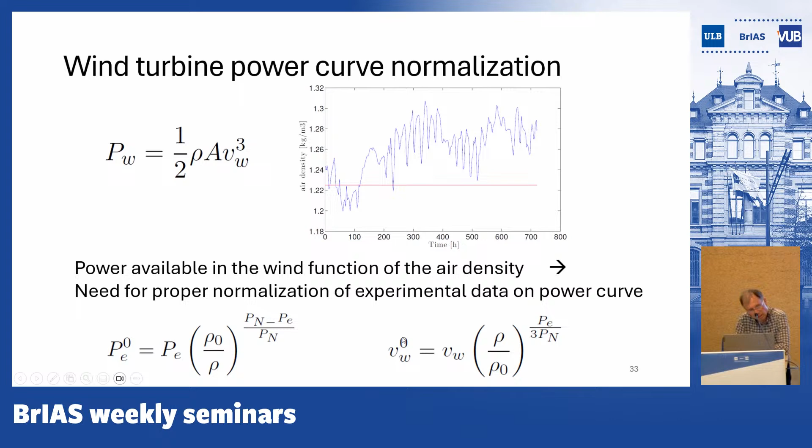So these operating conditions are different from normal operation, and so we should discard them to have a monitoring system that covers most of the operating cases.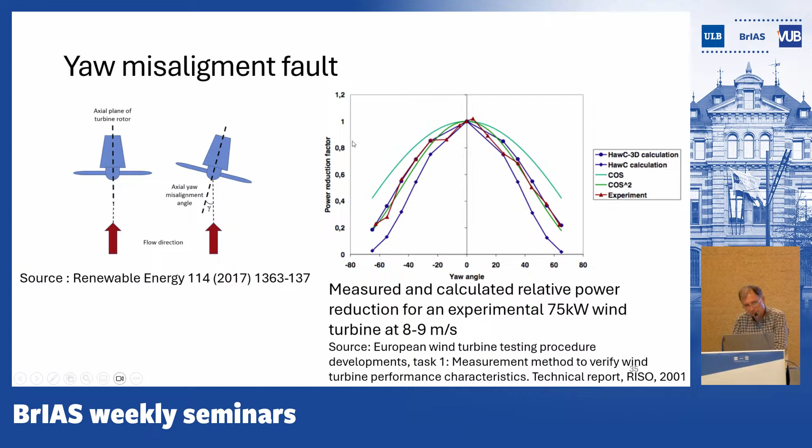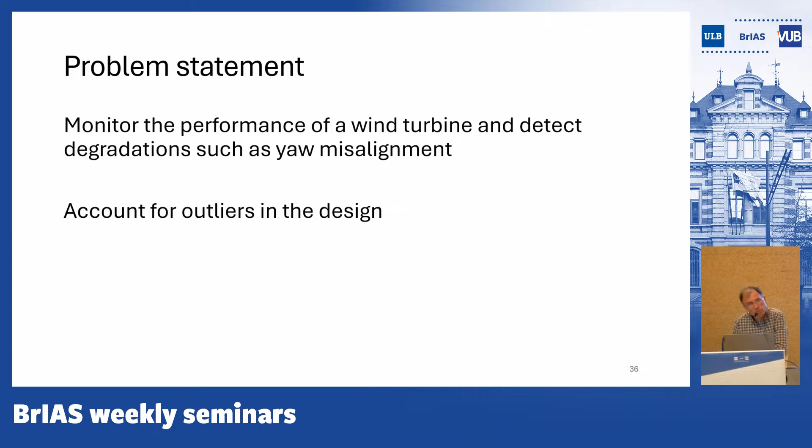So what is the problem we aim to solve? We want to monitor the performance of the wind turbine and detect degradation such as yaw misalignment, for instance. And we need to account for the outliers in the design.

So we will operate in the following two steps: first, residual generation, then decision system, and we will end up with a validation on real data. So actually these are already real data, but we will validate with real data corresponding to faulty operations.

Again, we will try to use very simple models, and as we are control engineers...

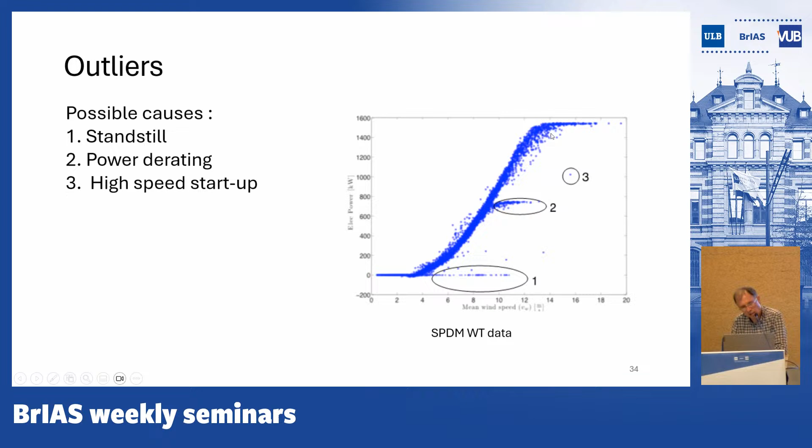If you flip the power curve here, and keep in mind that we are essentially interested in this operating zone, which is zone 2, corresponding to the maximum power point tracking zone—so if you flip this curve, you see a curve which is very similar to the step response of a typical second-order model. And that's what we have used to parameterize the curve linking the normalized power to the normalized wind speed.

And so now we must get rid of all these outliers. To do this, in statistics, it's classical to use iterative reweighted least squares.

That means that initially one will solve a least squares problem. So we will sum here, over all the samples, the square of the errors between the measured power and the estimated power from the model. And at first we will start with a weight which is equal to 1.

Then we will compute for each data point the error, and we will introduce a weight which has this shape here. So when the error is above a certain threshold, the corresponding data in the optimization problem is weighted less. And we iterate the determination of the parameters, so the solution of this optimization problem, until there is a small difference between two successive iterations.

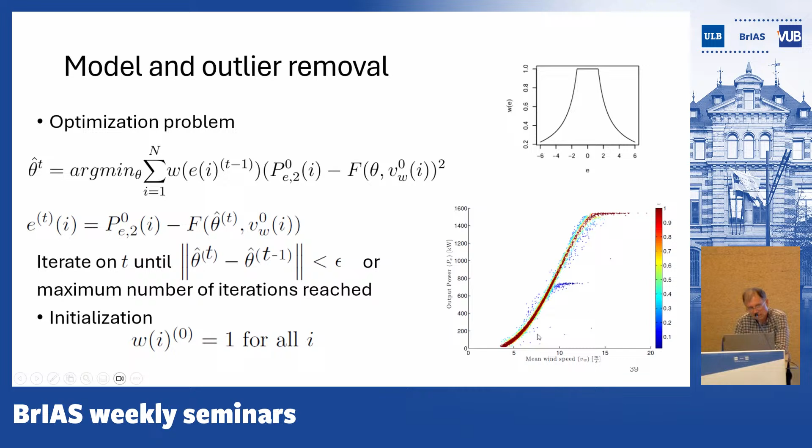Now we have our model of our power curve. Let's look at how well it fits when we are using actual wind turbine data. We have used here wind turbine data coming from two wind farms called SPDM and SEEBA respectively. And you see that the errors match quite well a Laplace probability density function.

So these are normalized histograms, and we will characterize these modeling errors by a Laplace distribution.

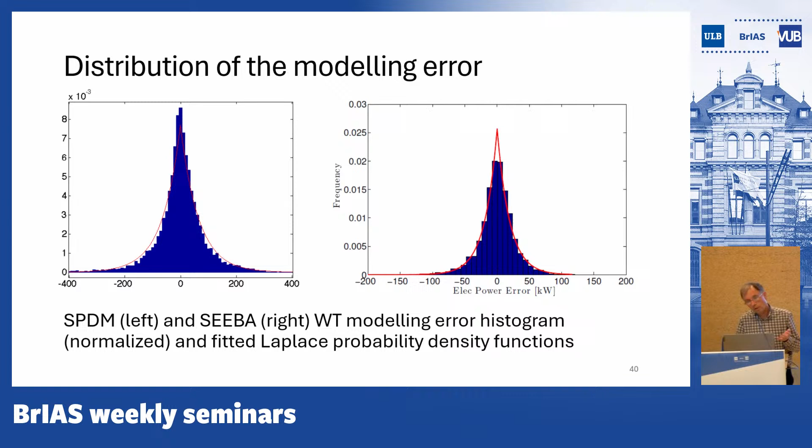Now the idea is to try to see what is the impact of a fault. Here, remember, we look at yaw misalignment. What is the impact of a fault on this error distribution? Can the distribution be used to characterize the presence of the fault or not?

As it's difficult to have faulty data on which we have sufficient control, we have used a realistic wind turbine simulator developed by NREL. It's called Aerodyn Fast, and we have simulated a 10-degree yaw misalignment.

The blue dots correspond to the faulty turbine, and you see that the deviation from the normal, healthy turbine essentially occurs in zone 2, and in the fast storm, soft storm transition zone. But as we are operating very seldom in this zone, we will discard it and focus on this zone.

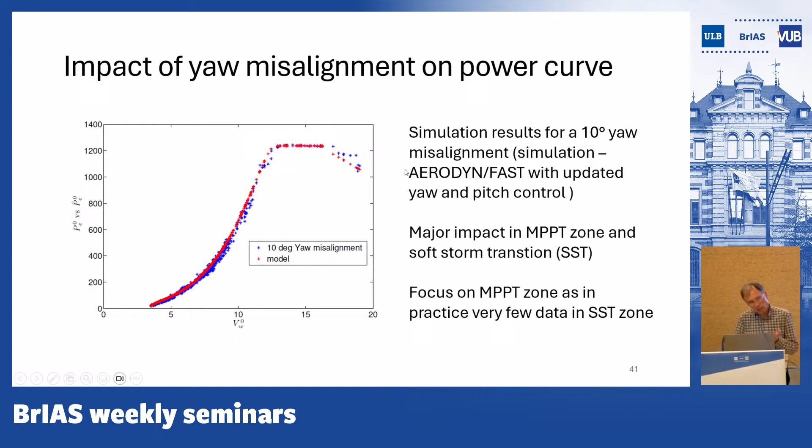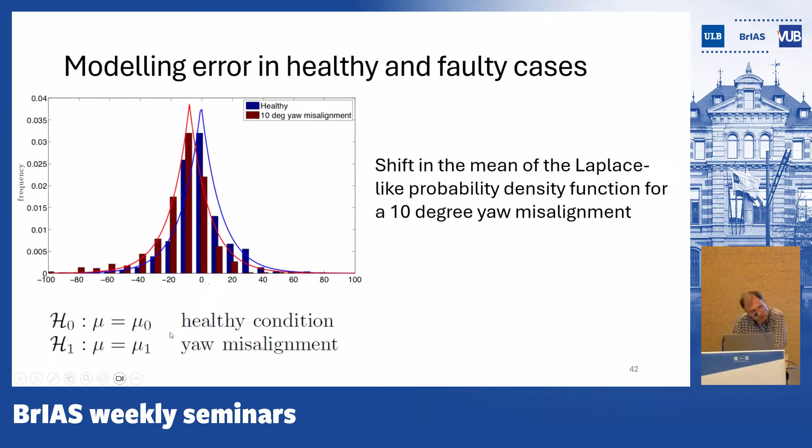This is the modeling error obtained upon occurrence of this yaw misalignment fault. You see there is a mean shift in the Laplace distribution, so that we could indeed detect a shift in the mean. In the healthy case, our Laplace distribution will have a mean very close to 0. In the faulty case, it will be shifted.

So our decision system can be based on the log likelihood ratio, or the likelihood ratio between the healthy and the faulty probability density functions.

More precisely, if you consider the modeling error, which we call R here for residual, for a given time horizon, and if you consider that these samples are independent, you can easily compute the likelihood function in the presence of the fault and the absence of the fault.

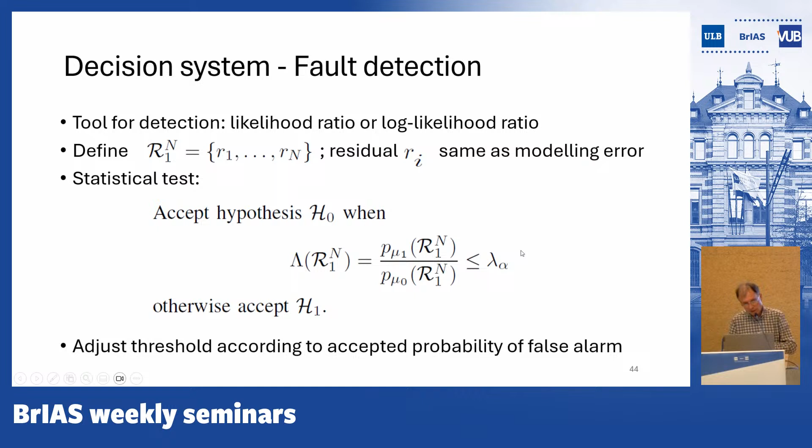A standard test consists in comparing this likelihood ratio to a threshold. If the likelihood ratio is below the threshold, it's the healthy case that dominates. If it's above, it's the faulty case that dominates. This threshold must be adjusted to ensure that the probability of false alarm is appropriate.

So just a few more words, speaking about generator cooling system monitoring. Here we speak about the cooling system of the generator in a wind turbine. This cooling system is actuated, or is made of fans.

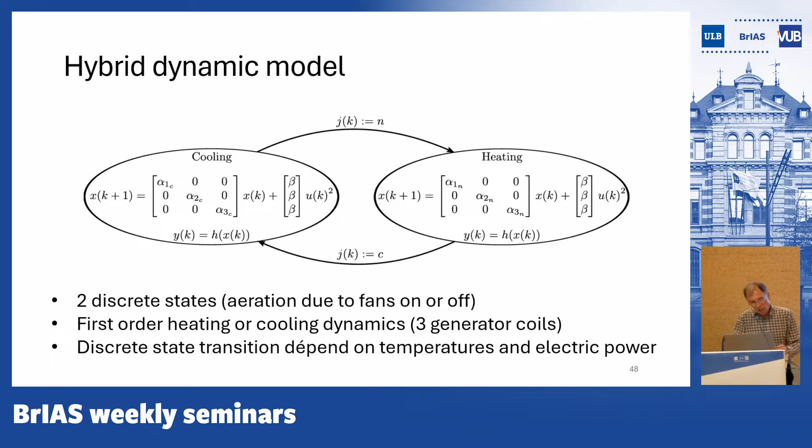Well, just keeping this very simple model and using, again, simple statistical tools, we were able to obtain a diagnosis system that has reasonable performance, or at least has some interesting properties as compared to what the SCADA system of the wind farm is doing.

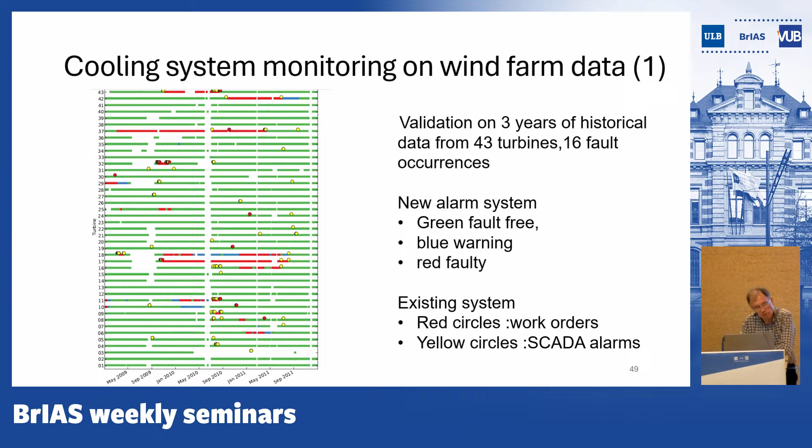And so that shows you that by using a simple dynamic model, you can already anticipate failures compared to what you have in a traditional SCADA system, quite long in advance in some cases.

So this said, I think I have given you a few elements, a few components for a diagnostic system. The way I would see a global diagnostic system, for instance, for a wind turbine, would be to have a series of such blocks that I have presented, preceded by a systematic measurement validation.

And as some of these blocks might be sensitive to the same faults, there is a need also for gathering the information issued by these blocks inside a global fault diagnosis system. The objective would be to have plug-and-play models that you could introduce in place of these blocks, and to have some systematic way to adapt this global fault decision system without redesigning it completely once you add a new device.

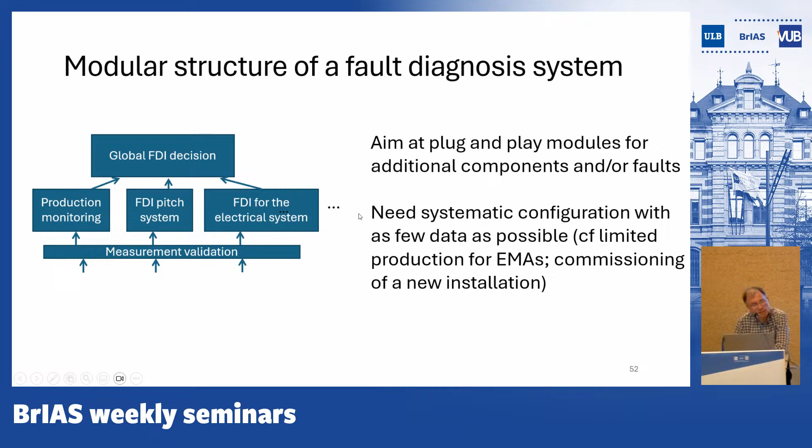So in conclusion, I hope I have shown you that it's possible to use reasonably simple models in fault diagnosis. You must be careful when you have real data to clean them properly, but there are ways to clean such data reasonably easily. Statistical approaches give you the possibility to detect relatively small faults.

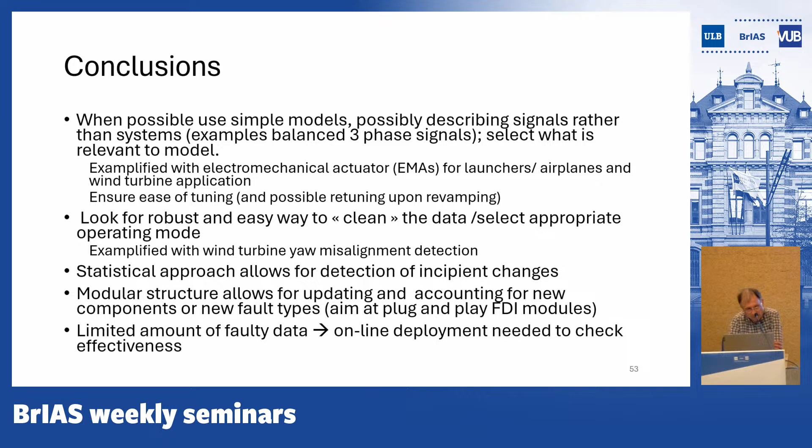And I believe that we should aim at modular structures for diagnosis systems. Finally, I think we should also aim at diagnostic systems that can be tuned with relatively few data. It's not possible to wait, for instance, that a wind farm has been operating for one year before being able to start monitoring it. So thank you for your attention, and I'm open to questions.

So I imagine there will be questions. Thank you, thank you very much for the very nice talk.

So I was curious—I think the main message of all these approaches is that we need to rely on a model in order to do fault detection. I guess modeling takes effort; we need to develop them, tune them, and then refine them over time. I wonder if there is a view towards moving to a framework where we only use data, a statistical framework or something along those lines, or if there is a strong view to remain on a model-based approach.

So I think what is model-based and what is not model-based is a real discussion. Because here, as you can see, I have a model, but it's a model of a sine wave, which is a signal. So is it model-based? Is it data-based? That could be discussed.

And so I think what I would like to stress is that, yes, we can use models, but we can go with very simple models if we analyze the problem sufficiently. What we should aim at is using models or methods that are as little dependent as possible on the operating mode of the system or some specific parameters of the system.